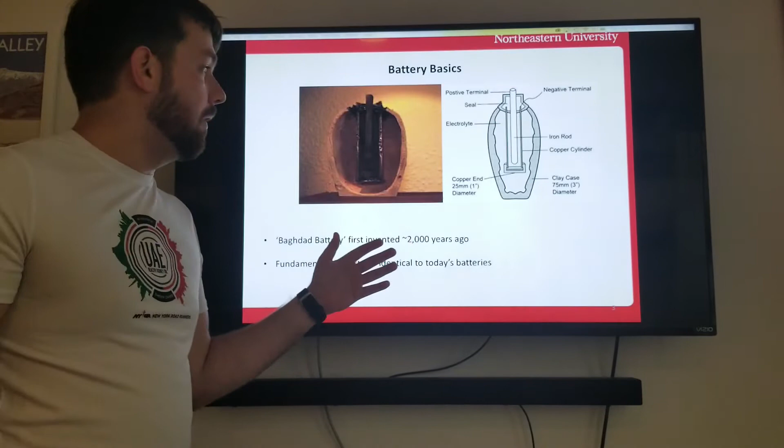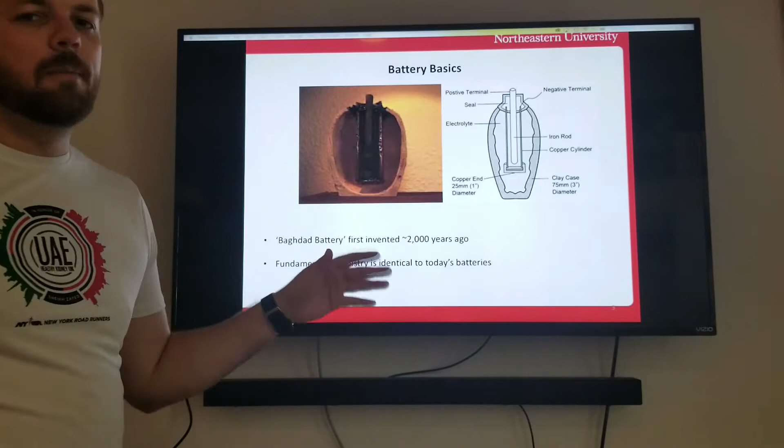I'm going to be giving my presentation today on flow batteries. I'll start with the basics. The very first battery is called the Baghdad battery. It was discovered in the 1900s, but it was invented over 2,000 years ago. But the battery technology has barely changed since. It has the same exact electrolytes and anode and cathode, almost identical to what we use today. Just some different chemistries, and we've definitely optimized a little bit.

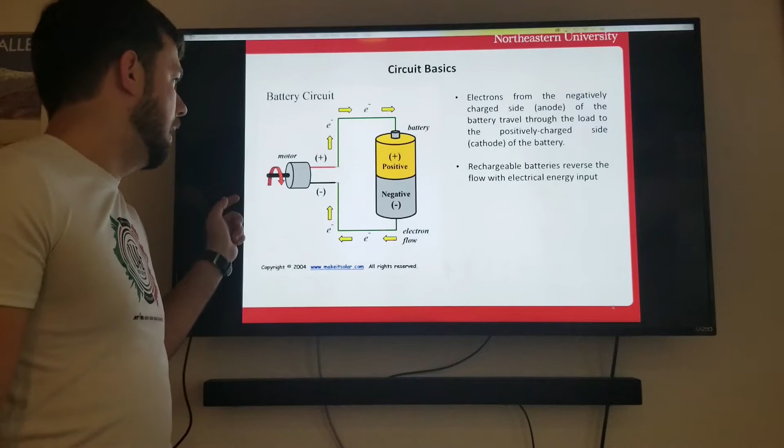Basics of a circuit is that the electrons will flow from the negative side of a battery through the circuit, through the load, and then around to the positive side of the battery. Rechargeable batteries can reverse the process by, instead of expending energy out, it will input energy in and recharge the battery.

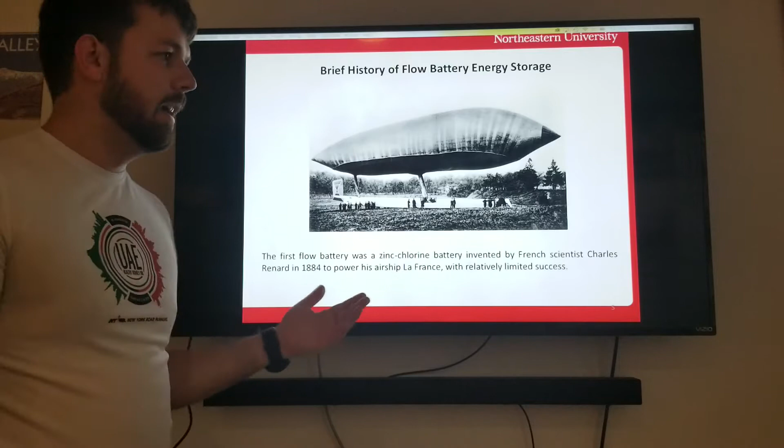The very first flow battery was invented by French scientist Charles Renard to power his all-electric airship. He got back only 5 times out of the 7 times he went out, so the technology was shelved, almost forgotten. It was revived by NASA in the 1970s as a potential storage for moon bases and Mars bases due to its reliability and durability.

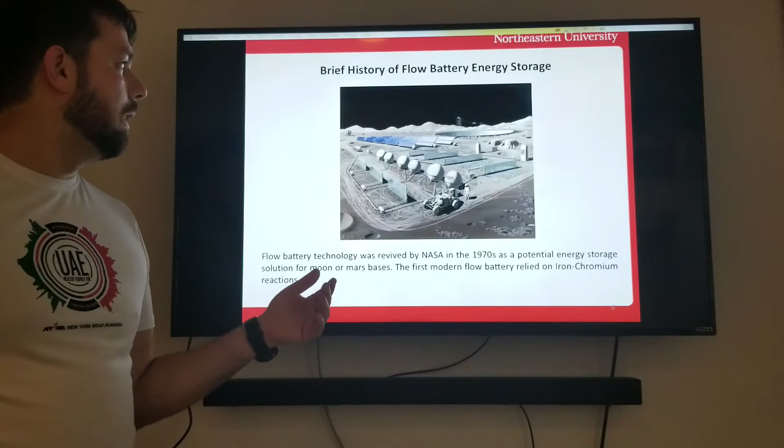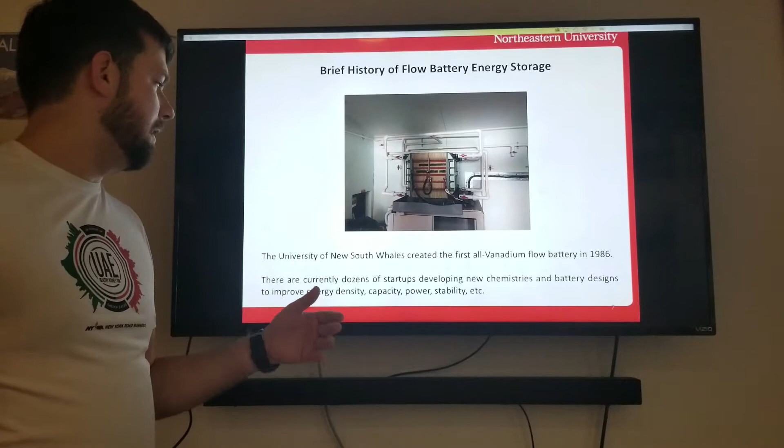And then more recently, research universities and startups have been pushing new technologies and new chemistries such as all vanadium batteries, organic batteries, etc. We'll get into that a little bit later.

Overview. Flow batteries are very similar to any battery that you can think of, except instead of the electrodes being made of the reacting material, the electrodes are neutral, and then the electrolytes actually get pumped around as a liquid, and that's where the reaction happens. They store the 2 electrolytes in 2 tanks, and they pump them together to the flow cell in the middle, and then as the process goes, the 2 chemicals kind of equalize.

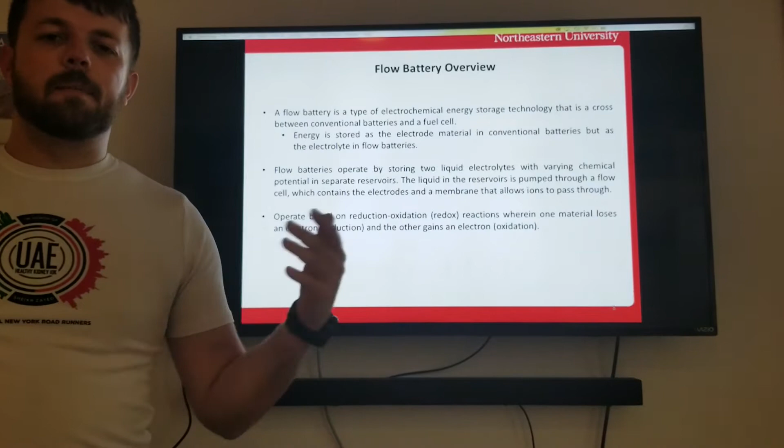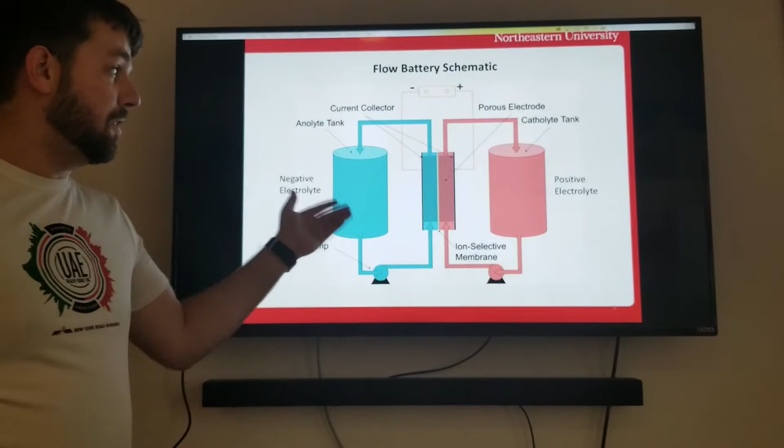And the main chemistry phenomenon behind it is called a redox, or reduction oxidation reaction, and we'll get to that in a little bit. Here's just a basic schematic of what a flow battery looks like. It really is just 2 tanks with separate electrolytes stored in. They get pumped around and meet in the middle.

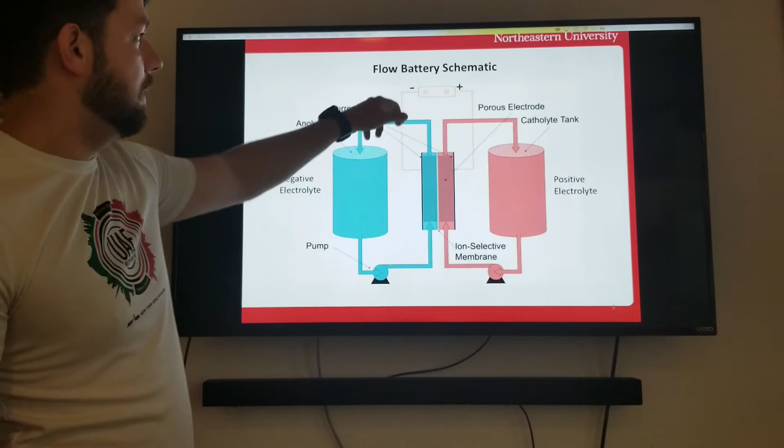And then, as we were talking about earlier, the circuit having to be complete, from the negative side here, the electrons, due to the voltage difference, will get pushed around the circuit through the load and then around to the positive side. And the circuit is completed by having a membrane here that allows positive ions to cross, thus equalizing and completing the circuit.

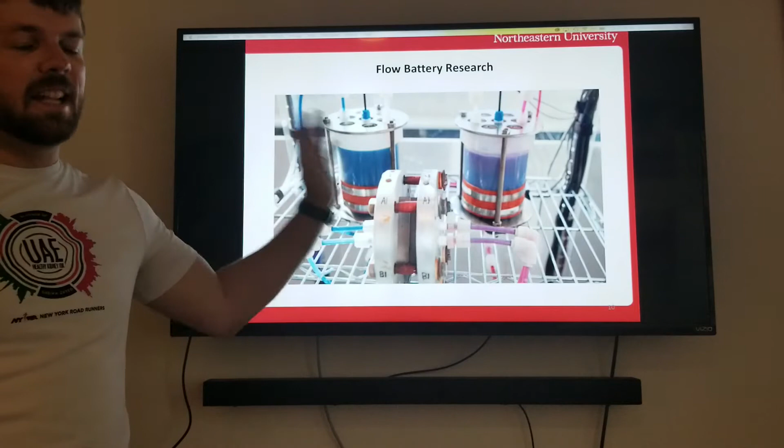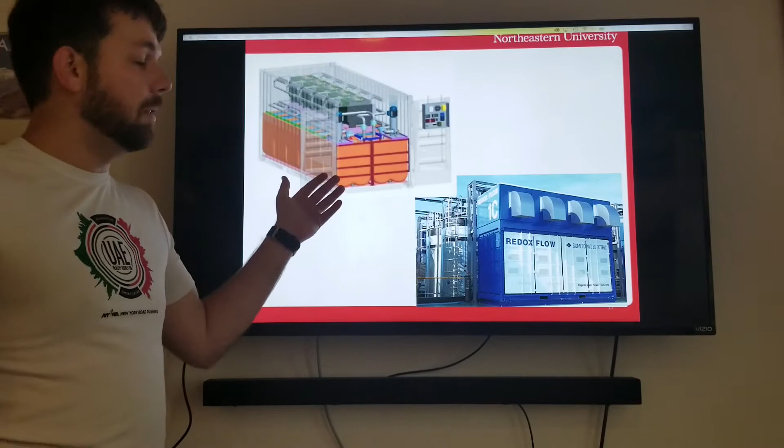Here's some examples of some industry flow batteries. It's still very new. There's only a couple of commercial applications so far, but again, it's the same thing. The tanks stored, and then the fuel cells here. The good thing is they're modular, so you can just add more of these depending on how much power you need. Again, here we can see the tanks again, and the cells are in here. Same process every time, very simple.

So the basis of all this is the reduction-oxidation reaction. Essentially what happens is that one side, the oxidized side, will donate an electron, and when it loses that electron, it's said to be oxidized. The material that gains the electron, which is the positive side, will gain that electron, and it's called reduced because its total charge is reduced by adding that electron.

The best way to remember it is the acronym OIL RIG. Oxidation is lose, it loses the electron. Reduction is gain. The reduced item gains the electron. It's a little backwards, but it makes sense.

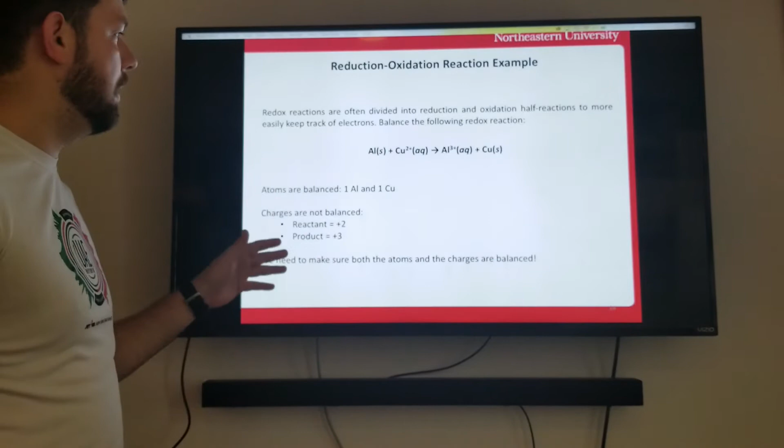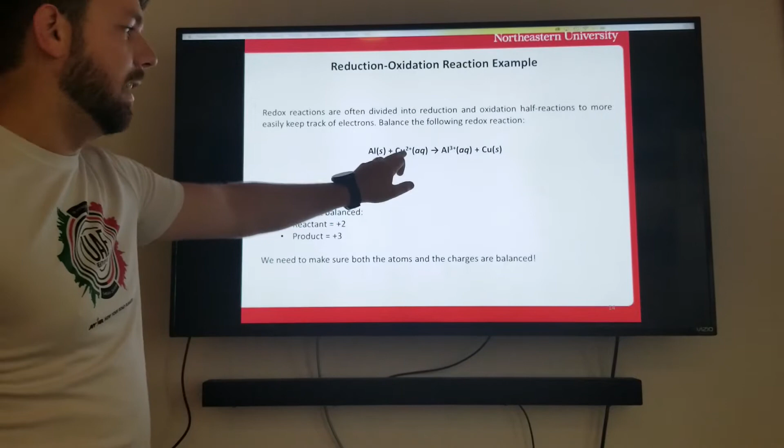For example, when you're trying to solve one of these redox equations, we usually split it up into 2 half reactions that allow us to more easily analyze where these electrons are going and who gets what. So if we look at this first reaction, we can see that it seems balanced. We have the same number of aluminum on both sides, we have the same number of copper atoms on both sides. But the problem is that the reactant side only has a charge of +2, and the product side has a charge of +3. So not only do we need to balance the number of atoms, we need to balance the charge as well.

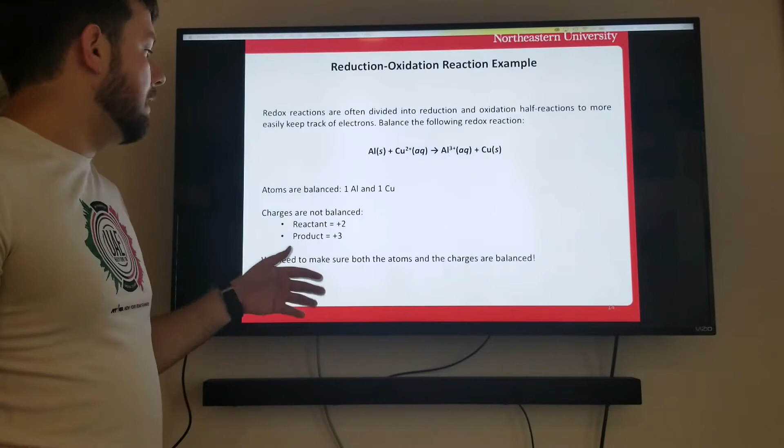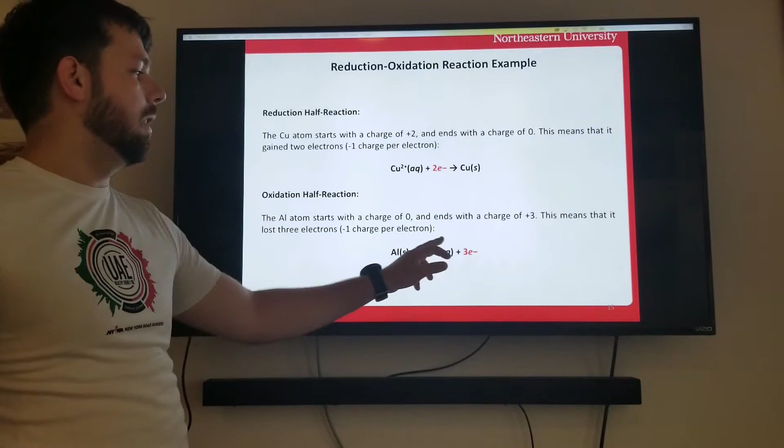And so when we split it into the reduction half reaction, the reduction is gain, so the one gaining electrons. Our copper had a charge of +2 in the reactant, when the product had a charge of 0, so it must have gained 2 electrons. And then in the oxidation half reaction, it loses the electrons. The aluminum started off with a charge of 0, but ended up with a charge of +3, so that must mean it lost 3 electrons in the process.

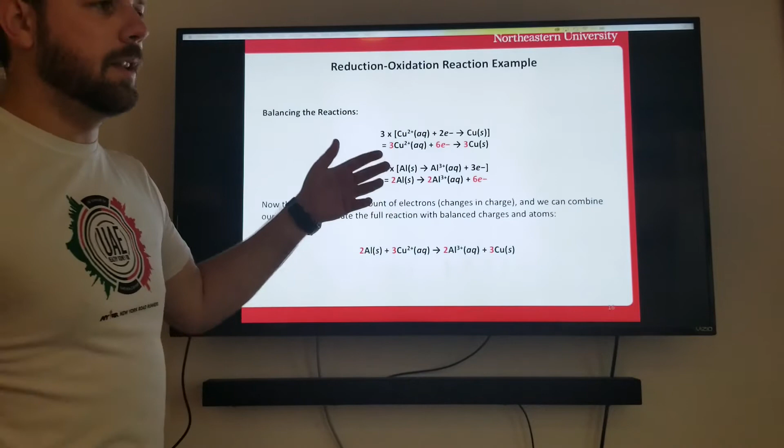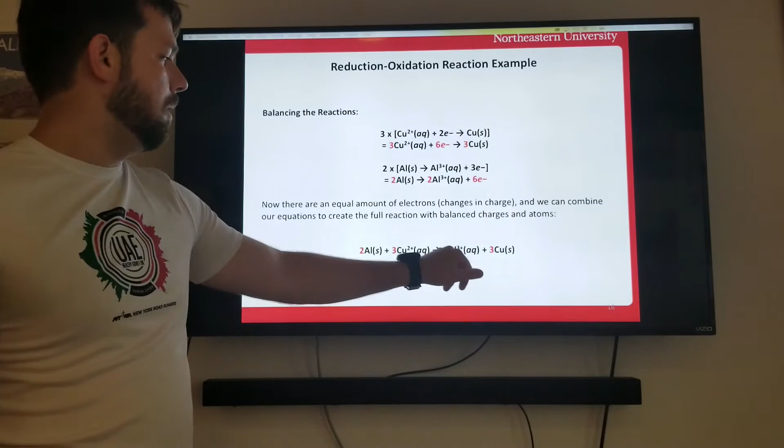And now, very simple, all we have to do is the same way that we would balance a chemical equation by the atoms, we do it with the charge as well. So we take the least common multiple of them both, so we end up with the same number of electrons traveling, and that ends up with 2 aluminums and 3 coppers. So now we have a charge of +6 over here, 3 times +2, and a charge of +6 over here, 2 times +3. And there's the same number of aluminum and the same number of copper.

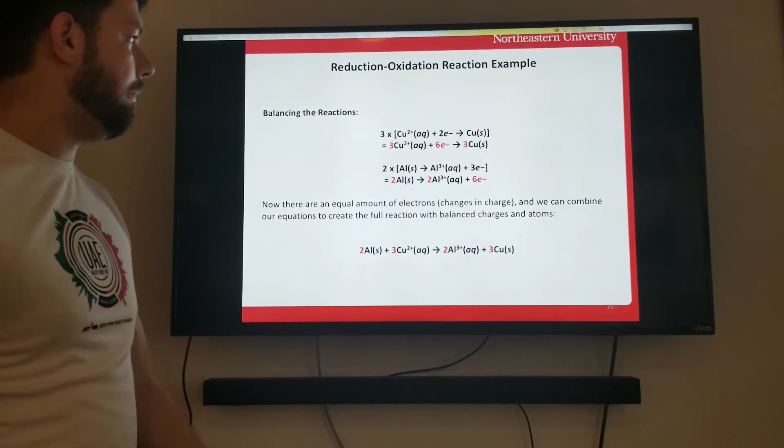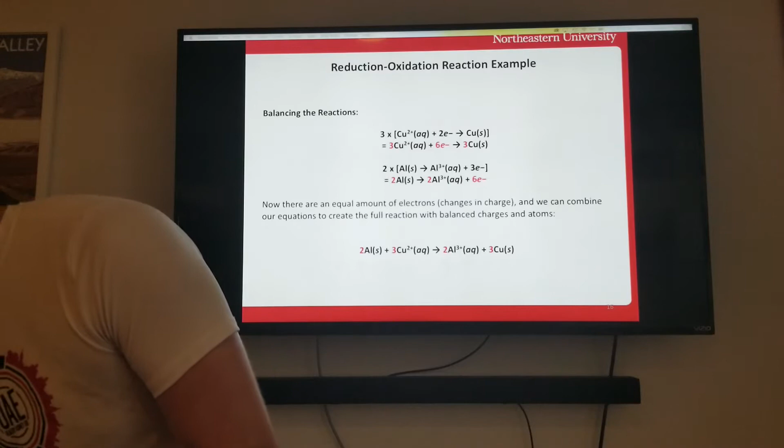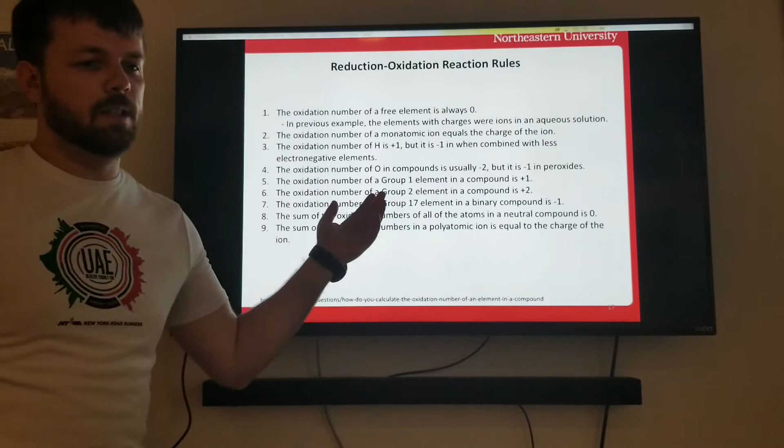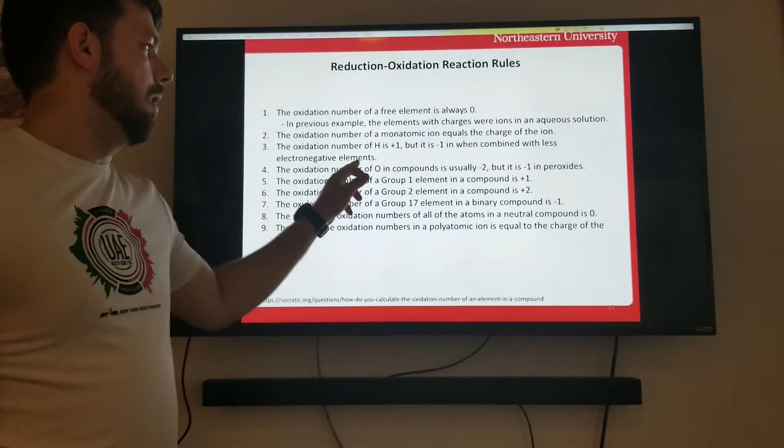During these reactions, there's a lot of rules. Of course, just like the English language, there's a lot of caveats as well. But these, in general, are the rules that apply to these reactions and help you at least get started. Namely, that the oxidation number of a free element is 0, the aluminum and copper in solid state before, and the oxidation number of oxygen is usually -2. From those 2 rules, you can usually find out what's going on.

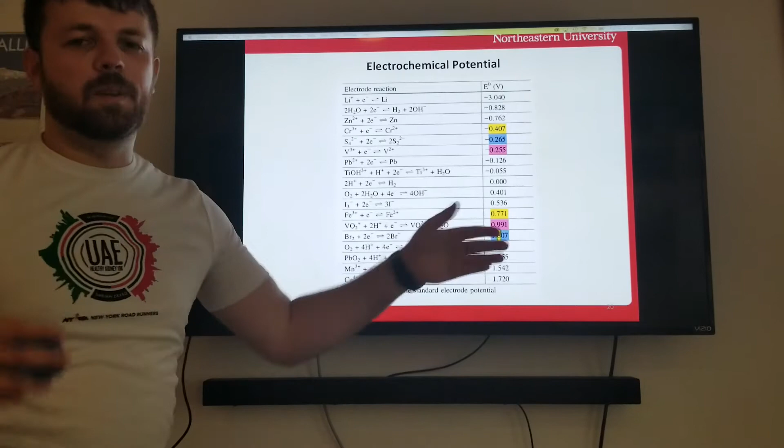And so here's a chart of the electrochemical potential, and this is where you decide how powerful your battery can be. And you would think that you would want the highest difference between the 2, for example, if you use lithium and cerium over here. The only problem is that those reactions are very violent and hard to control, and so it's a balance of having the largest potential difference as possible with the safest reaction. And so the color-coded ones are the ones we're going to go into next: iron chromium, and then bromine sulfide, and then all vanadium.

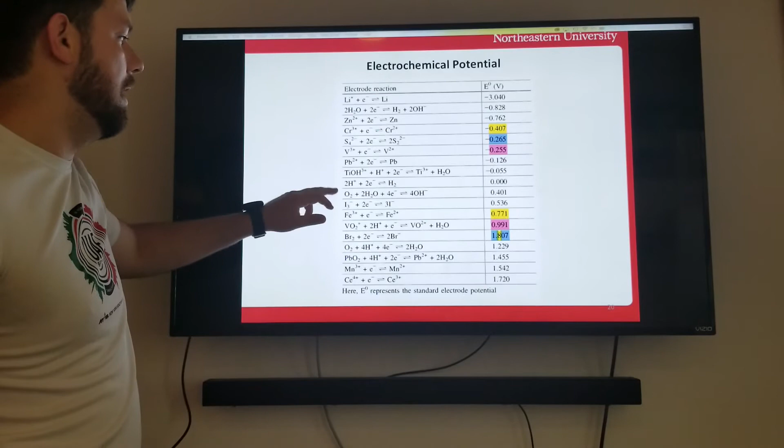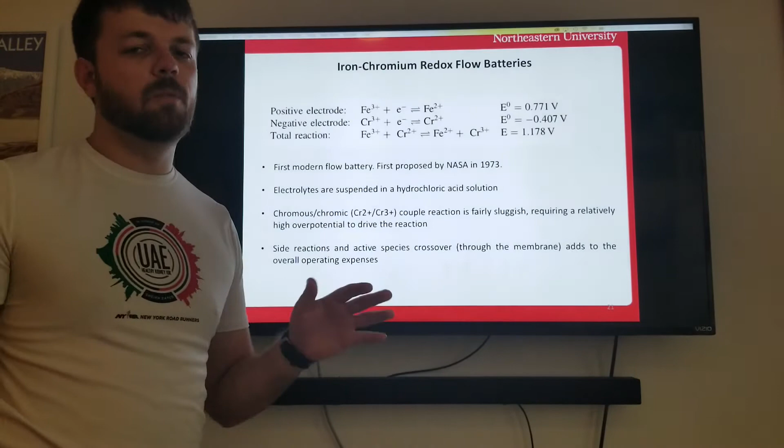Iron chromium was the first one. We were talking about NASA earlier. They revived the redox flow battery. It makes sense. It's easy. The materials aren't terribly expensive. Chromium is a little expensive, but the biggest problem is that the chromium itself reacts very slowly, and so you have to really add a ton of voltage to push it along, and that just makes it not very useful in most applications.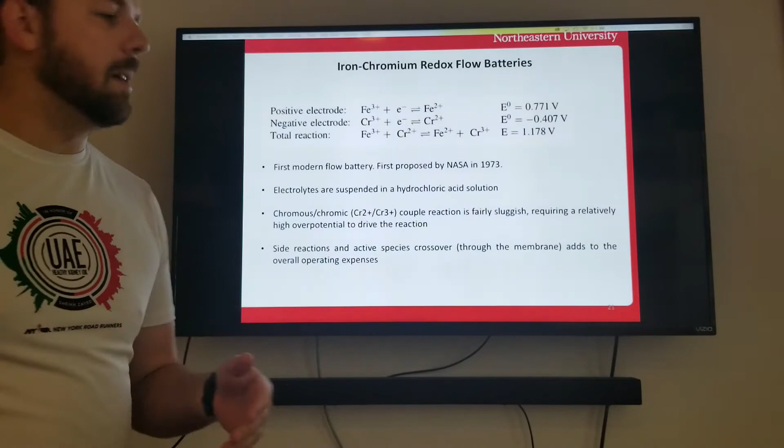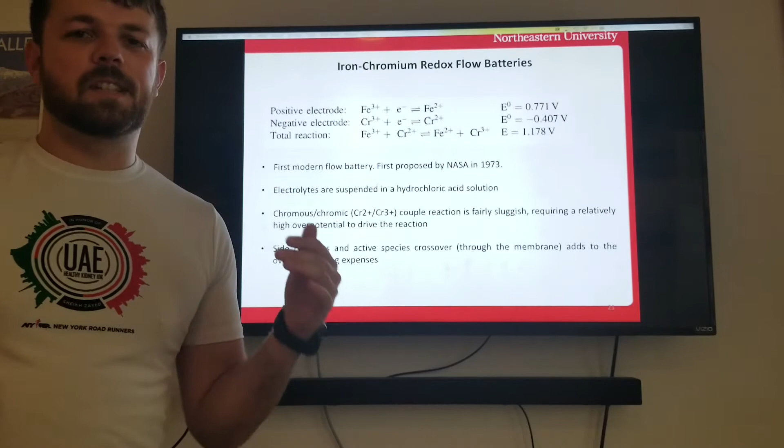Also, the biggest problem with these is that your membrane is there to separate your materials while allowing ions to cross. But a lot of the times the materials can cross through and sneak through, and that just starts to degrade your battery. And that can also create side reactions that corrode your materials and just gunk up the whole system.

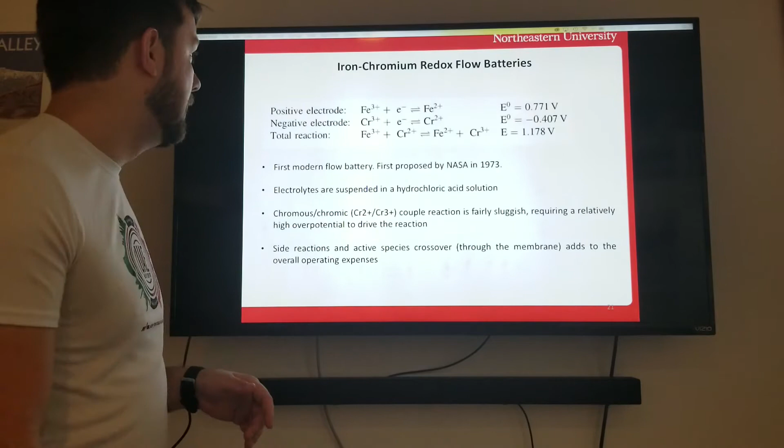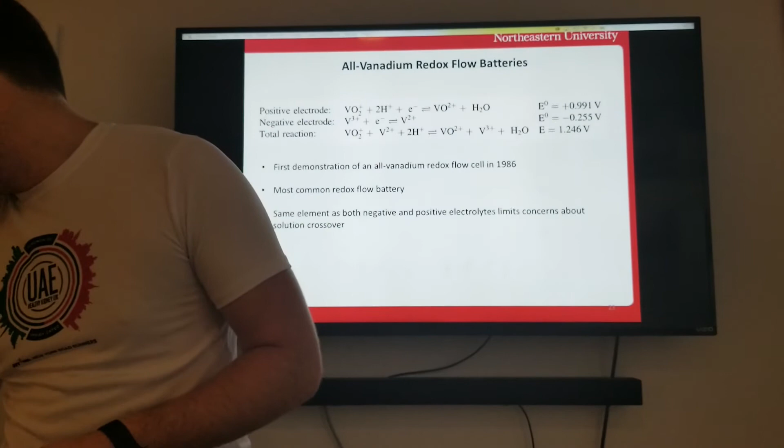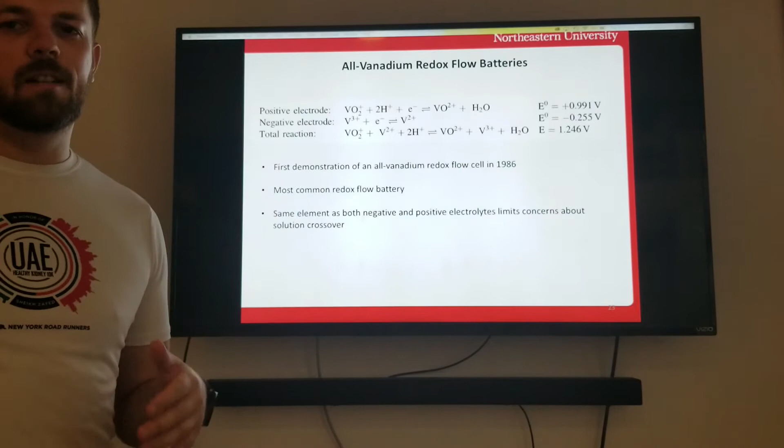The latest and greatest is the all vanadium flow batteries. This one is great because the vanadium, if it crosses over, it's not that big a deal. You just have to charge the vanadium the way that you want it for the reaction. But if there's a little bit of crossover, it's no big deal at all. It's the most common one. A lot of the startups now are using it. Vanadium mining is getting bigger and bigger because they see an option. Problem is, vanadium is very expensive.

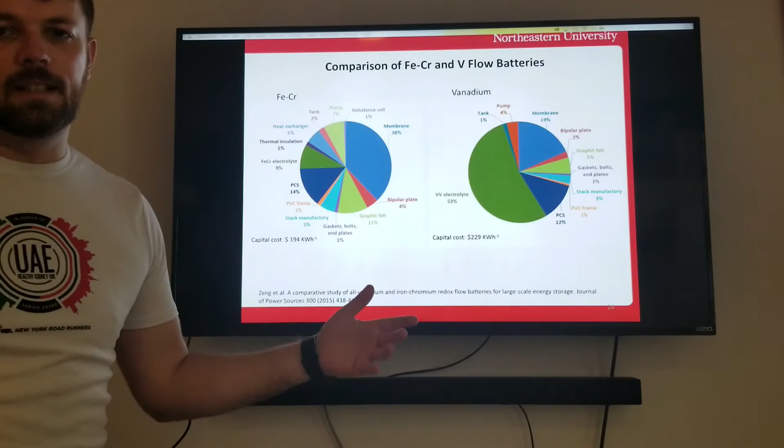So here's a cost comparison of the iron chromium and the vanadium flow batteries. As you can see, the membrane is very expensive. It is by far the most expensive part of the iron chromium batteries, and if it degrades all the time and you keep having to replace it, that really does add up to your total O&M costs.

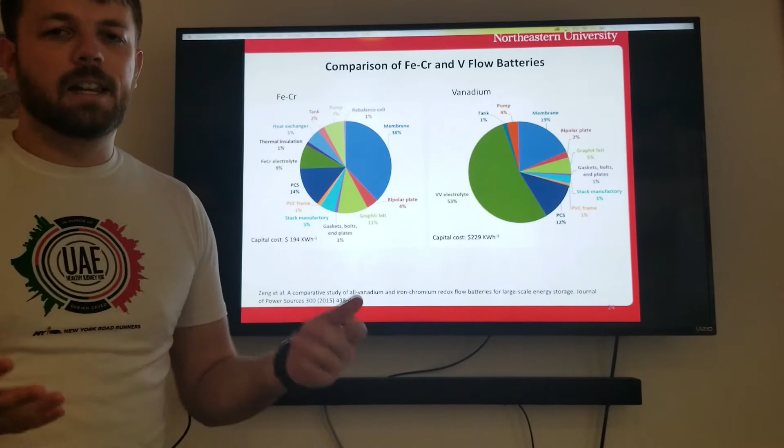The vanadium on the other side, the membrane is still a substantial chunk, but the problem is the vanadium itself is so expensive as a material, and material costs generally don't go down. The material is a commodity, that's just what it costs. And with it being such a huge chunk, it's going to be really hard to cut down on the total capital cost if the material doesn't get any cheaper.

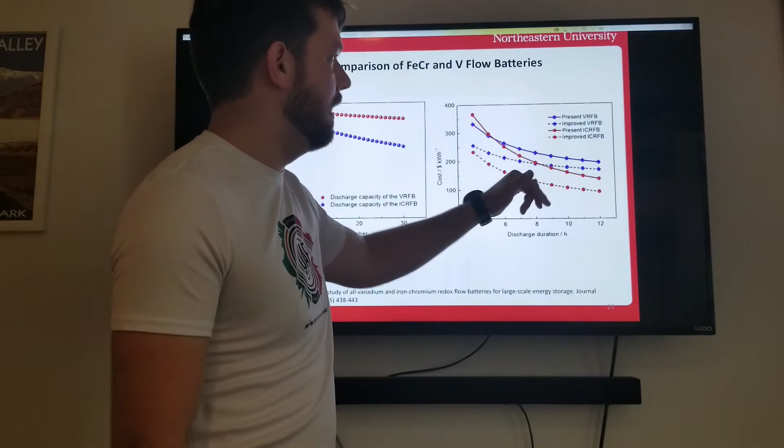And then here on the right side, we have the total cost versus your duration of discharge, which is very important for long duration energy storage for large grid applications. And again, we can see the blue is, well, they switched this time. The blue is the vanadium, and the red is the iron chromium.

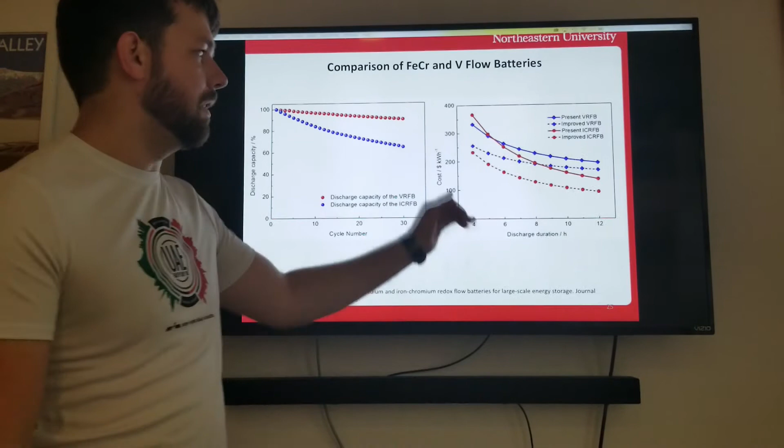And as you get to the large discharge duration, the capacity of your battery is decided by the amount of material you'll have, and so vanadium is just going to reach a plateau, and it's not going to get any cheaper. And iron chromium is supposed to get cheaper theoretically, but it's not terribly promising at the moment.

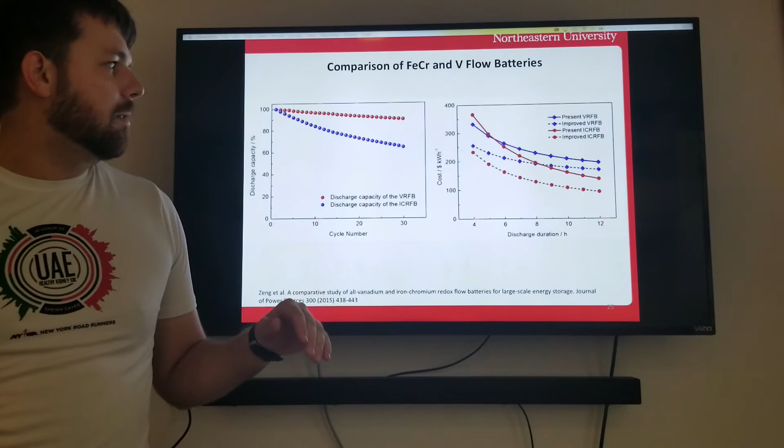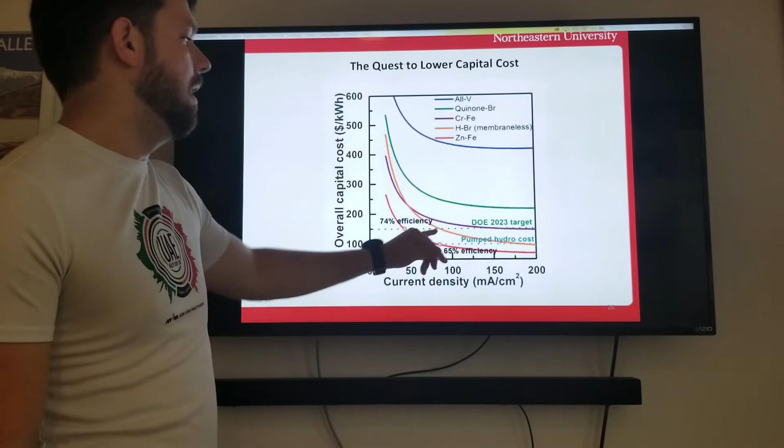Some of these are apparently very optimistic, but it is possible theoretically for some of these flow batteries to meet the DOE target, and then eventually end up being cheaper than pumped hydro. But at the moment, they tend to be all around about here, $200 to $250 per kilowatt hour.

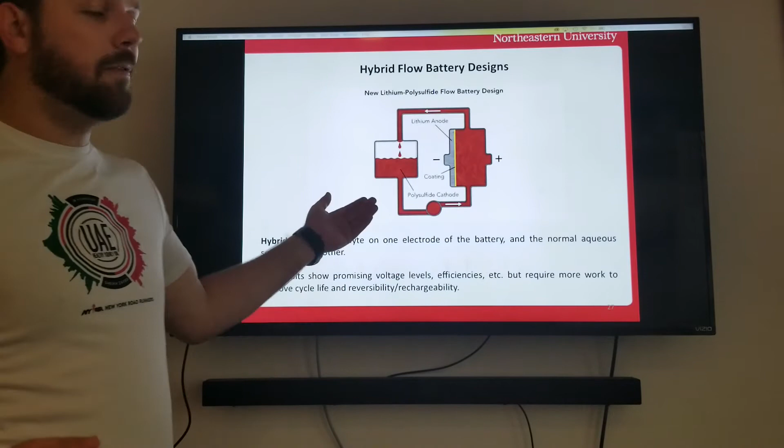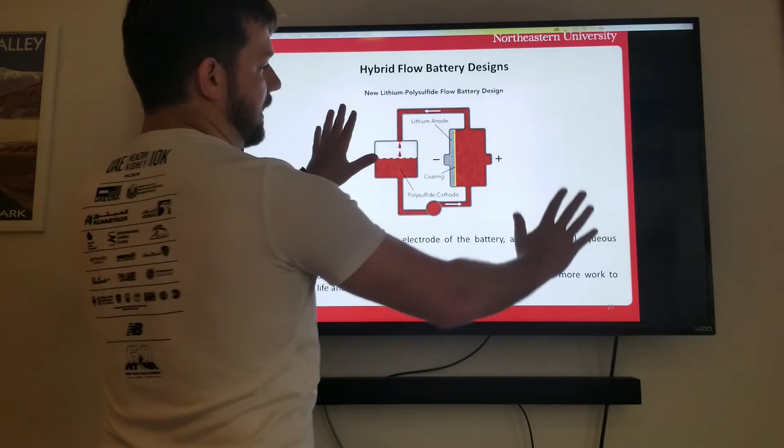So some new designs coming out. There's a hybrid flow battery, which is kind of a combination of a regular lithium battery, but still having one side pumped. So basically, instead of having the two tanks, you use a regular lithium anode like you do in lithium-ion batteries, but then you pump the electrolyte around it.

And it's pretty promising, but right now the big problem is cycle life. It can only do maybe a dozen cycles, and it's hard to reverse the process and recharge the battery. But this is one of the more promising designs that's coming out.

Additionally, there's membraneless batteries, which sounds very optimistic to me, but the whole point is that they rely on laminar flow, so they introduce the materials together and hope that they don't mix by staying in laminar flow and very stable, and then split back off. And that allows them to freely trade ions without mixing, theoretically. But there's a lot of research going into membraneless flow batteries.

And then finally, there's organic flow batteries. They tend to be a lot safer. The organic materials are much more stable, cheaper, but they tend to have less of a voltage potential difference, and there are some corrosion problems when it comes to the membranes with those.

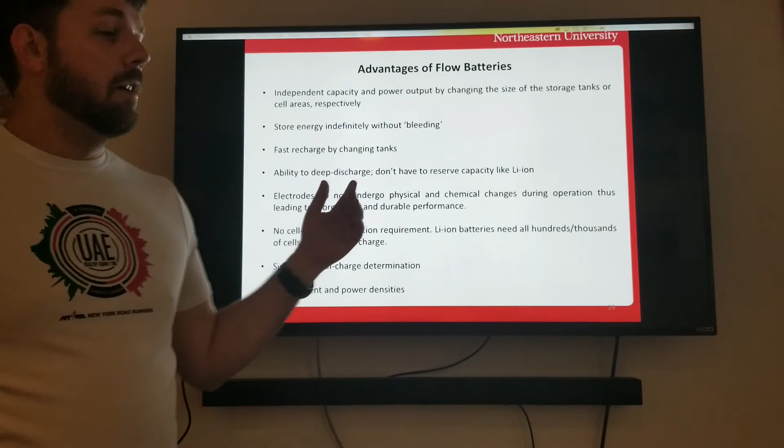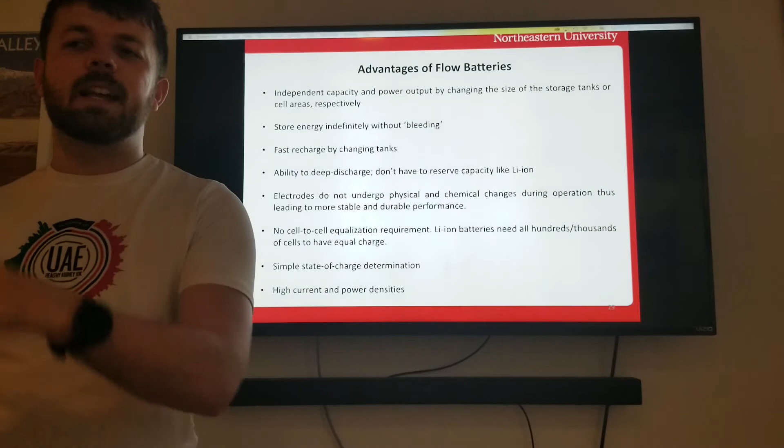So some advantages of flow batteries. It's just like a car. If you think about the power being determined by the engine size and your capacity determined by the fuel tank, and they're independent, that's the same thing with this battery. You can make it last forever with low power, or forever with high power, or you can change it however you want depending on your cell size and your tank size.

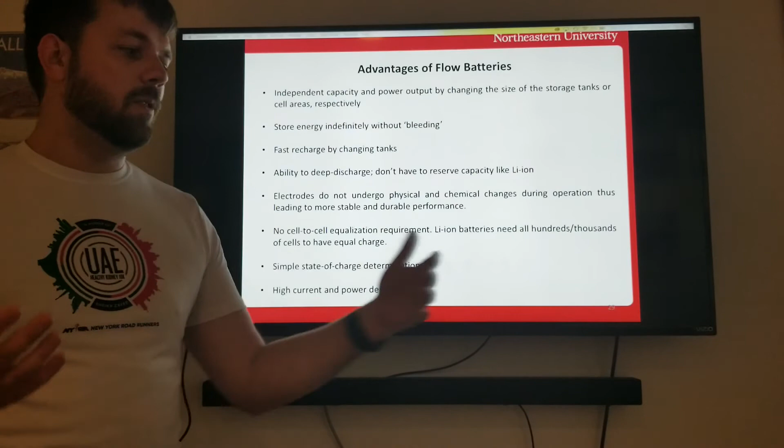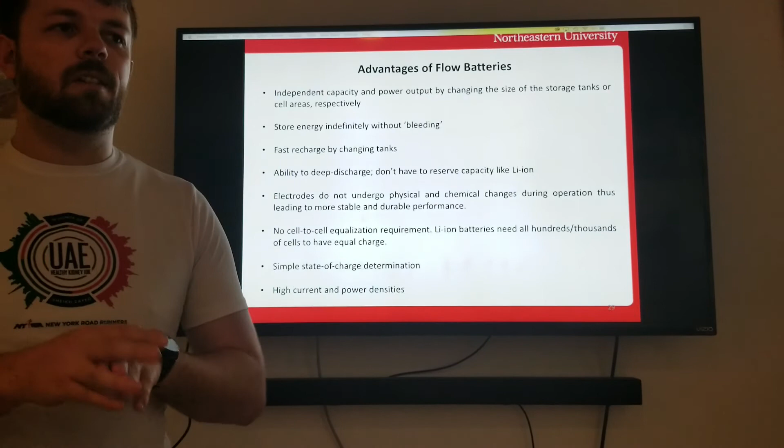It doesn't bleed. For example, if you leave your laptop not plugged in in your backpack for 2 weeks, it's going to have less capacity later on, and you wonder why your battery's at 80% if you haven't even used it. Because these materials are just stored separately and don't react, that's not a problem with flow batteries.

Additionally, they can recharge super fast. So let's say you're at a high intensity time of the day where you need a lot of power, and you start running out of power. You can use the same cells, but instead you can just cut off your initial tanks and open up 2 new tanks, and it's like you have a brand new battery ready to go.

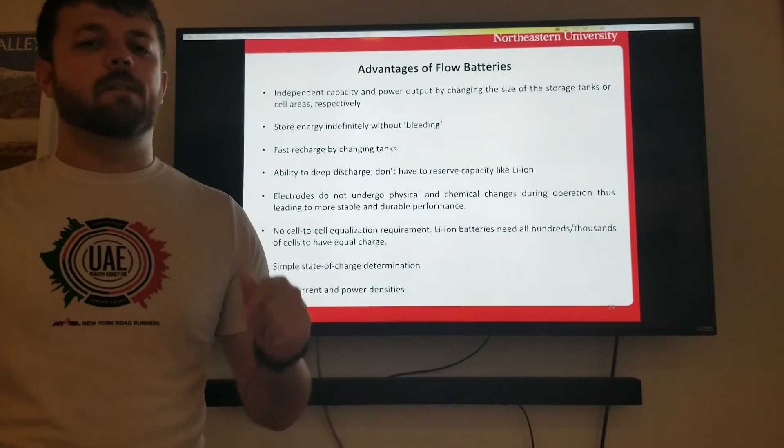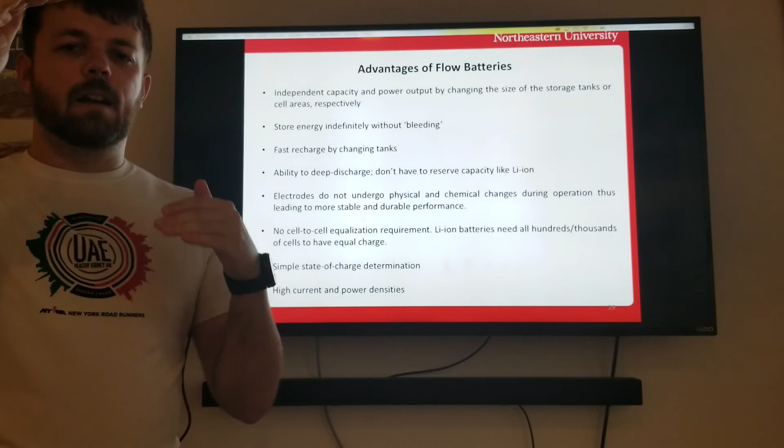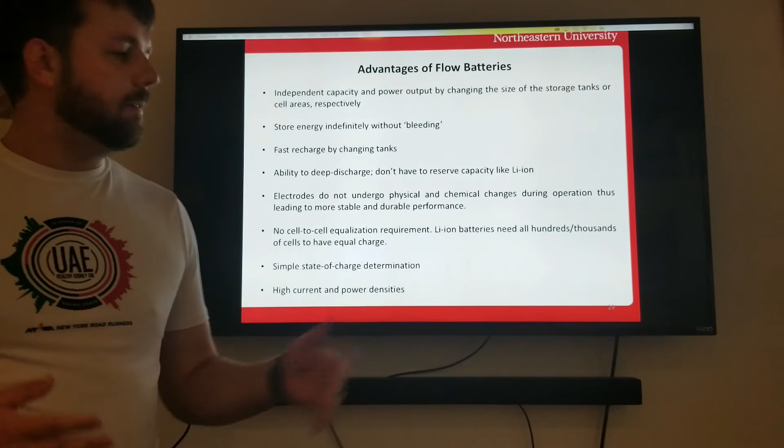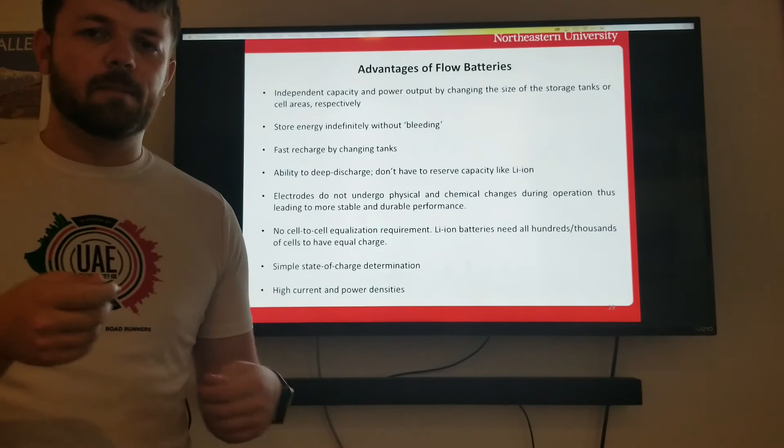It has the ability to deep discharge. You can go all the way to 0%, unlike lithium, which has about a 20% cap on either side in order to prevent damage. You don't have to worry about that with flow batteries. Because the electrodes aren't the reactive species, they don't degrade, which is a huge problem with the nickel cobalt in these lithium batteries. It's easy to tell the state of charge. You can just run a voltmeter sensor inside of your material, and the voltage tells you your capacity.

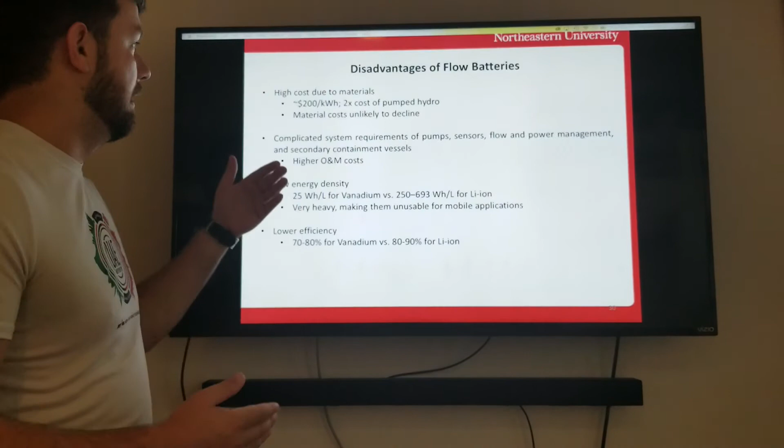Disadvantages are the big ones. It's very expensive, at almost double the cost of pumped hydro, and it's going to take a renaissance moment for those costs to come down, as they're mostly related to materials. A lot of times it's more complicated because you have pumps and you have these tanks and all these seals, and the membrane is very expensive and is usually corroded. And you're dealing with fluid flow, which is much more complicated than steady state reactions, which can add to your O&M costs.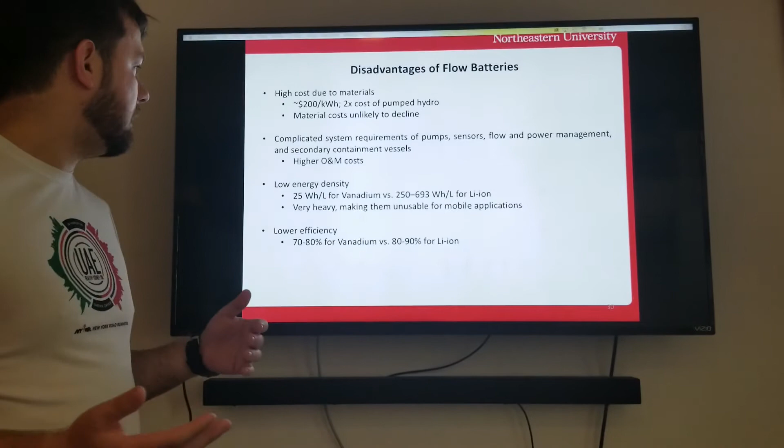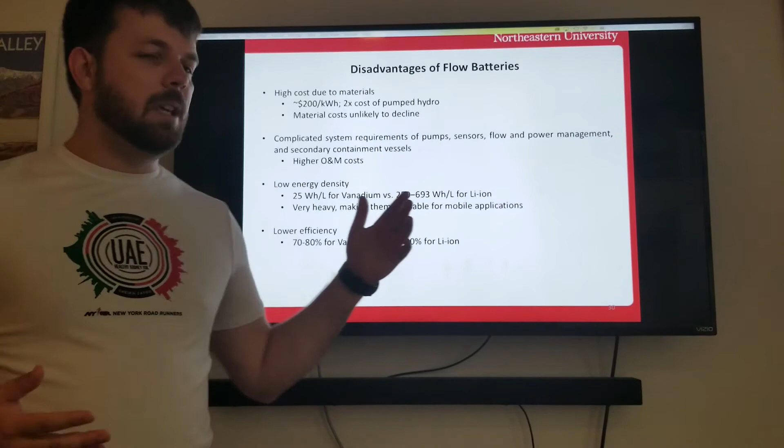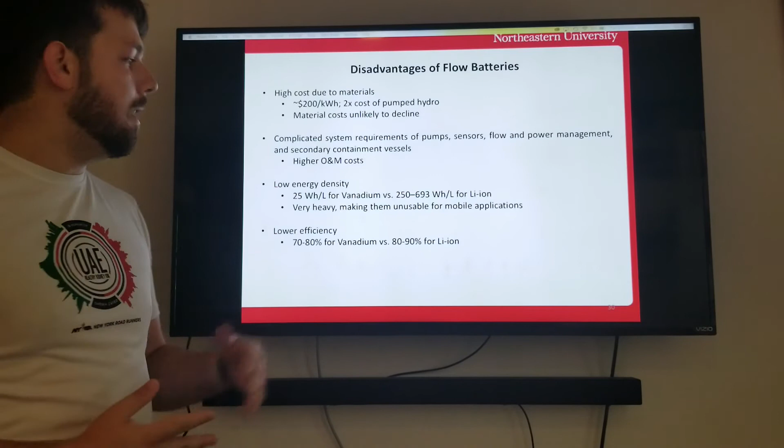And the biggest one, it has low energy density. These things have got to be big. So they're never going to be powering a car or cell phone, but that makes them great for grid applications where you have a ton of space out by a substation or something like that. And then finally, currently they have low efficiency, especially compared to lithium-ion batteries, 70 to 80% just within the system. But once you add in the inverters and everything, it gets down to about 60%.

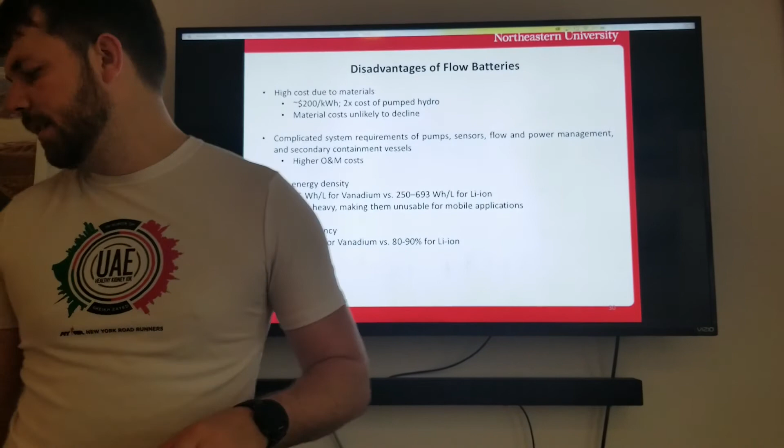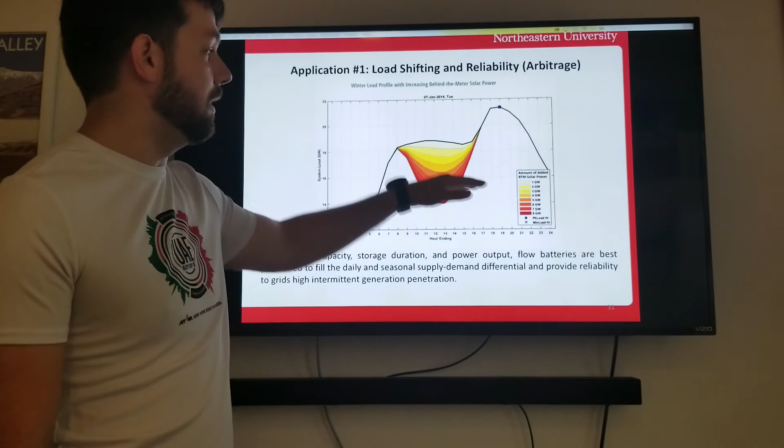And so what you can do is buy your electricity and charge your flow battery when it's cheap with this very high solar, and then use it to shave the peak and allow you to run your base load supply of your natural gas plants and nuclear and hydro at a much more level power.

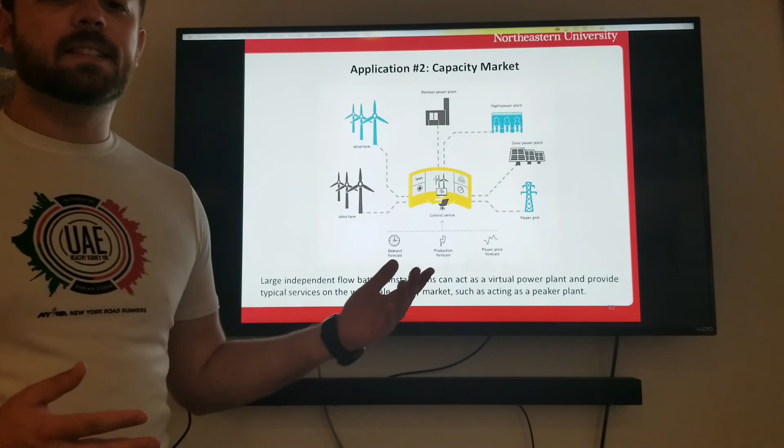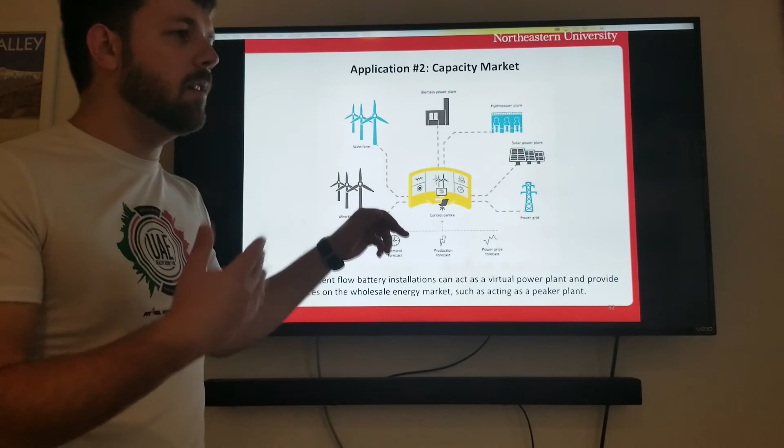Secondly, it can serve in the capacity market. All of the independent system operators around the country have wholesale markets where you can buy and sell electricity. One of the things they can pay you for is to have capacity. So during that peak time, currently a lot of really dirty natural gas and coal plants are fired up to serve that peak, and they are very expensive. But what you can do throughout the day is charge it from the power grid when it's cheap overnight. If it's very windy or very sunny for a while, you charge up with the wind and with your biomass and your hydropower, etc.

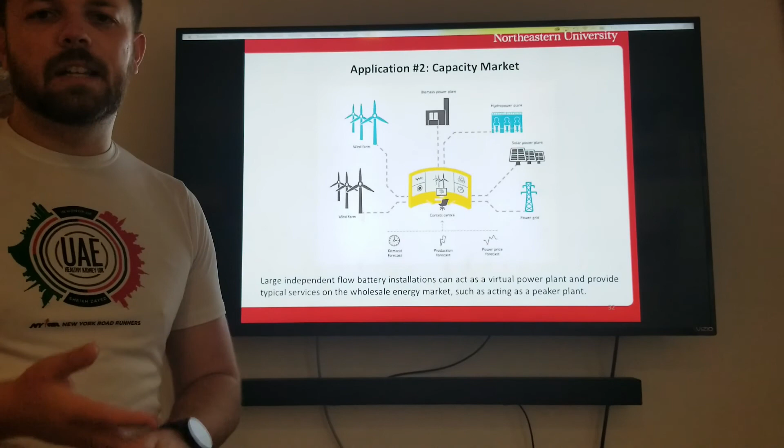And you can use a large vanadium battery or large flow battery system as almost a virtual power plant, because it can react very quickly, and it tends to be cheaper and a lot less dirty than using those peaker plants.

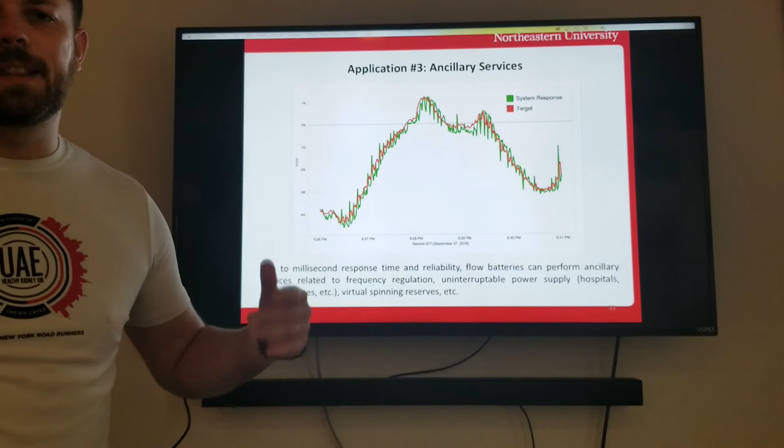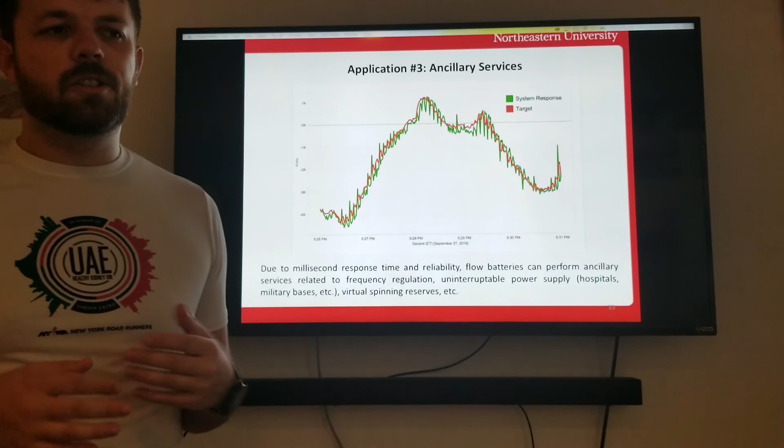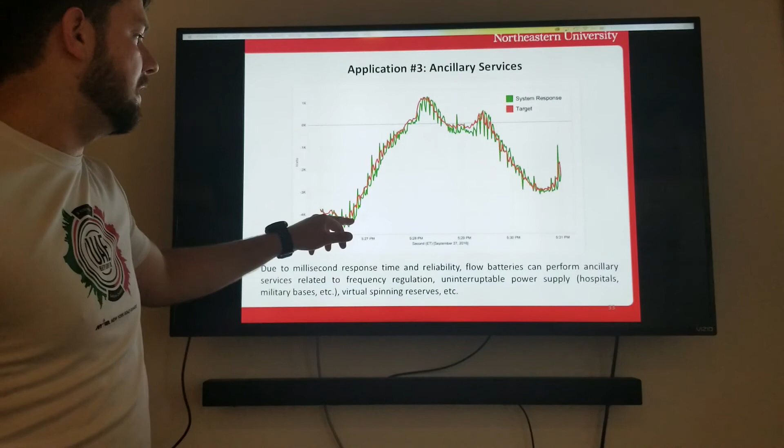And finally, due to its very fast reaction time, and the same thing goes for lithium-ion batteries and flywheels and many of the other ones, it can provide ancillary services. They call it value stacking, where instead of just supplying energy, you can get paid for these kind of services as well. For example, here is the load curve in red, and the green is us trying to meet it. We're never exactly on it, but we're close enough. But trying to track that requires a very quick reaction time from our power sources, and allows us to stay with the 60 hertz that we're supposed to be trying for.

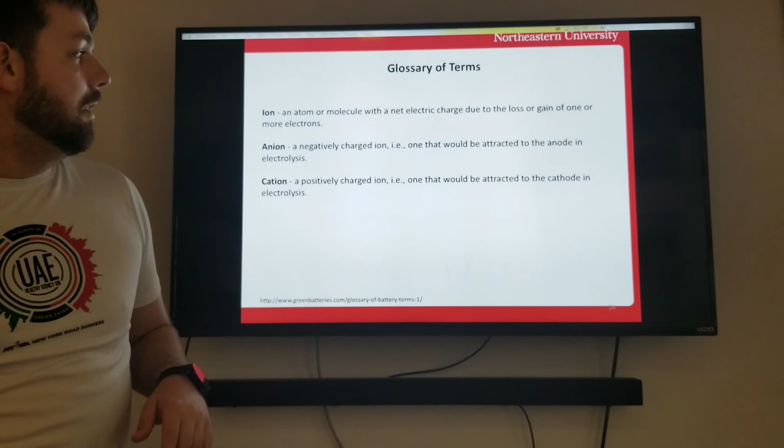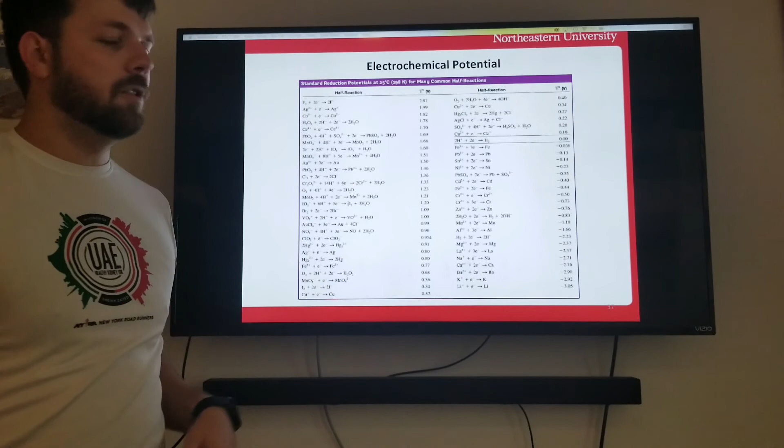And then here at the end, I just have a glossary of terms that should help anybody with the homework, the basics of the batteries, etc. And then a much larger, more comprehensive voltage potential chart. That's my presentation.